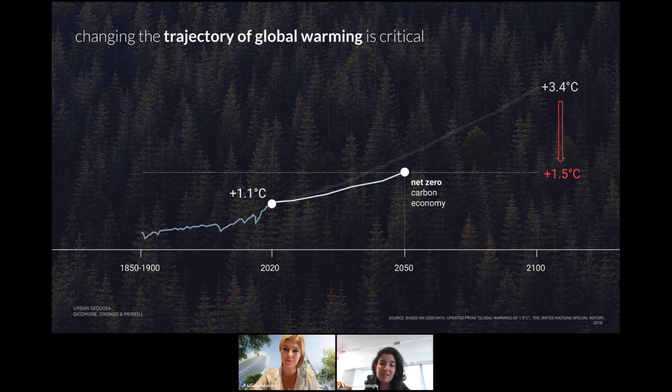I always say I was born into an amazing world, and I'm hoping to leave an amazing world for my son as well. Many of us on this call probably share similar feelings. So there's a greater incentive for all of us as designers to try to find solutions here.

So we're trying to decouple those trends, and the built environment has a big role to play here. Cities around the world are growing, and we're going to need twice as much built area as we have today by 2060. This means demand on cities will grow, demand on the planet for energy will grow, and emissions are likely to grow unless we find radical forms of reduction and absorption from the atmosphere.

In this equation, cities account for 70% of our global carbon emissions every year—that's huge. And it's not just buildings, of course, but also industry and transportation around them. But we should note that cities have the potential to be the best performers in terms of carbon emissions if we do them right.

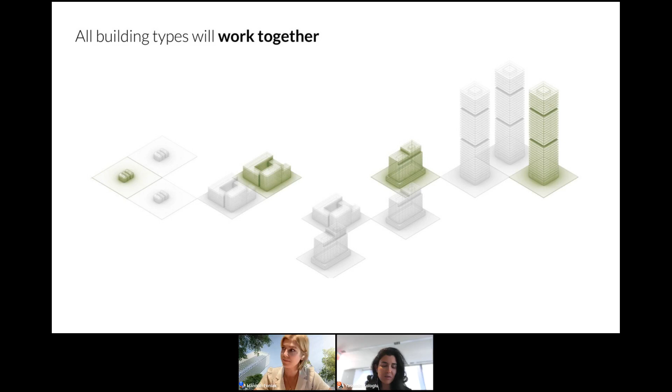So going into Urban Sequoia in more detail now, what we're proposing here is we are looking at 3 different types of innovation coming into the built environment. The first one is biomaterials.

So these are materials that are innovative in the way that they work - either they absorb carbon from the atmosphere in the way they're generated, or they might continue to absorb carbon from the atmosphere. The second one is nature-based solutions.

So these are systems that could use photosynthesis, which is a natural phenomena that our trees use. For example, systems like microalgae systems that exist in other farm format right now, not used in buildings, but they're farms that we use for microalgae production, and they're also a great source of biofuel.

And the last one is technological advancements, such as direct air capture technologies. These are machines that actually can absorb carbon from the atmosphere directly and use them elsewhere in different industries, almost as a commodity. I'm going to explain in a little bit more detail.

As part of this effort, before we even got to these innovative systems, we looked at what we can do to optimize our buildings first. Simply by using modularity of our systems and prefabricated systems, we are able to reduce the total carbon emission of a building about 30%.

This is already huge, and the point we were making is that we have to reduce as much as we can first, and then use these innovative technologies to further enhance the performance, the absorption of the building. That's the path these buildings will need to take.

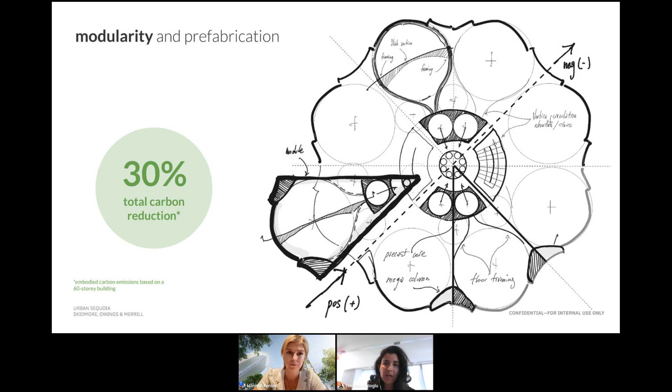And then the next step was for us to look at the holistic integration of components. Our buildings are often designed in such a way that they're additive - we'll look at the structure, then the MEP, then the floor finish, and the interior design.

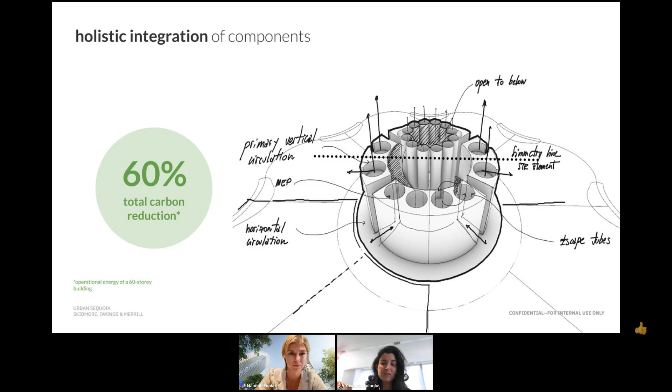We were thinking, can we approach it from a slightly different angle? Can we look at an integration of all systems? This will result in another 60% reduction in the building systems, in the energy use and carbon emissions altogether.

And what this could mean actually is that if we look at the overall picture, we are able to potentially reduce the carbon emissions of these buildings by 95% upfront. And then over 60 years of their lifespan, not only are they not emitting further carbon, but they're actually absorbing 350% more than they would have emitted as a typical building.

This is huge. Can you imagine a world where buildings act like trees? They're not part of the problem, but part of the solution to our climate, to our greenhouse gas emissions. And this was quite interesting to think about as a single building.

But we also realized that the potential of this is much greater when we think about it as a whole group of buildings, a network of structures, a city network, and maybe even a global network where buildings talk to each other. These networks work with each other and complement each other.

And by doing so, we could actually use some of the carbon saved elsewhere, the microalgae produced elsewhere, and create a synergy between buildings and the built environment to further optimize the carbon emissions, the carbon reduction and carbon absorption of the built environment.

So coming back to how do we do this, you'll see that we highlighted a couple of ideas here. The algae and biomass, the biomaterials, as well as the direct air capture, direct carbon capture basically from the atmosphere. And let's go into them a little bit more.

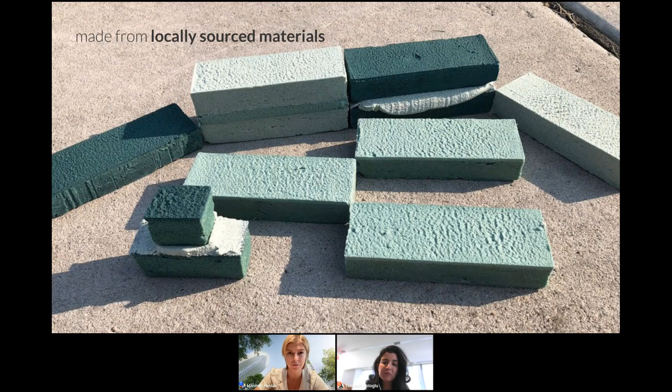And what's impressive about this is it uses, again, the simple materials we're talking about here. But all the materials, all the substances used in this, are food grade. So these are actually safe materials—in fact, it's the kids of one of the scientists we're working with at the research institute who are casting these materials to showcase it.

And the benefit of it is because it basically uses sand, a hydrogel, and algae, and you can imagine that many of these exist in many places around the world. So we're not thinking this is a solution only for the Western world or the Northern or Southern Hemisphere, but actually a solution applicable to many locations, remote or not, city or rural, across the globe at a broad scale.

This isn't the only material of its kind, but I wanted to highlight one of them today. For example, Biocrete is another one we talk about, Biobrick is the one we talked about, and bioplastic for example. All of these materials could absorb carbon from the atmosphere and become part of our solution here.

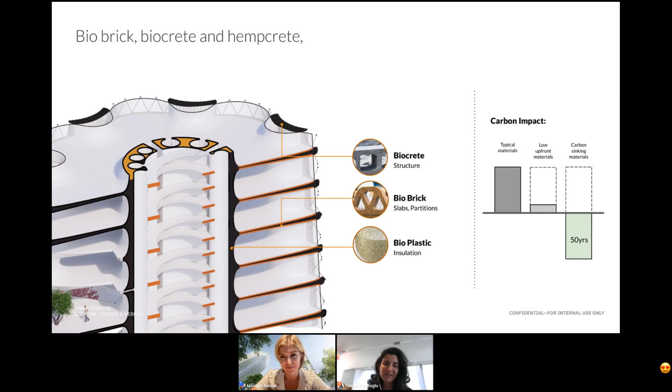Can we advocate for or explore the wider use of some of these materials to achieve that carbon sinking strategy I talked about over the lifespan of the building? Can our structures, our partitions, our walls be made of this type of material? Can you imagine, let's say my apartment was actually absorbing carbon from the atmosphere as I'm living in it? What a great story to tell, but also what a great cause for a building to serve.

And the great thing about some of these materials is also that they're often produced and cast, and they can come in different shapes. They're often coming as modular elements, which further enhances our idea of the modularity that I talked about in the beginning.

Now I'm going to pivot to a different system, to the nature-based solutions that we talked about. When coupled with technological advancement, nature-based solutions that benefit from photosynthesis, for example absorbing carbon directly from the atmosphere, represent great opportunities for us as well.

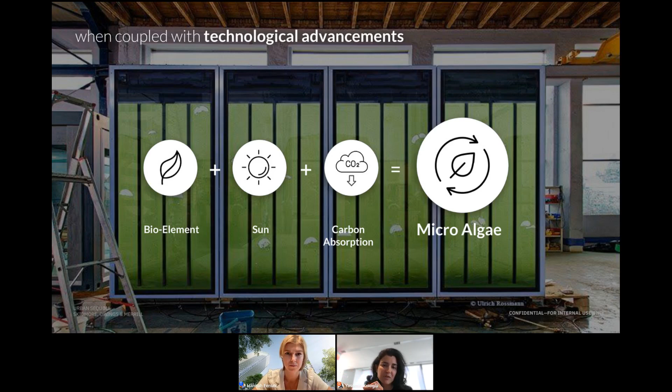In this scenario, this is actually a built facade developed in Germany that uses algae and sunlight, producing more microalgae in the system and absorbing carbon from the atmosphere. Fairly simple, actually, and you might have seen it in farm formats too. These are pictures of some of the microalgae farms that exist around the world.

It's often used as a biofuel, biomass, biomaterial to complement and replace some of the fossil fuels, for example, or reduce the demand on bioelements that we have in our agricultural fields.

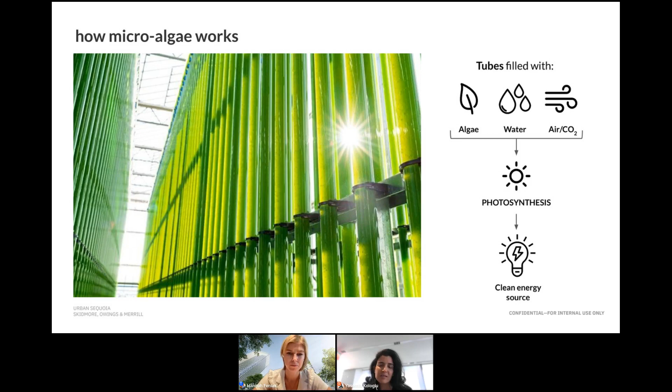And it's fairly simple again. It's a clean source of energy, relying on photosynthesis, producing algae, using water and direct sunlight to produce this. So can we think of a world where parts of our buildings could actually adopt these?

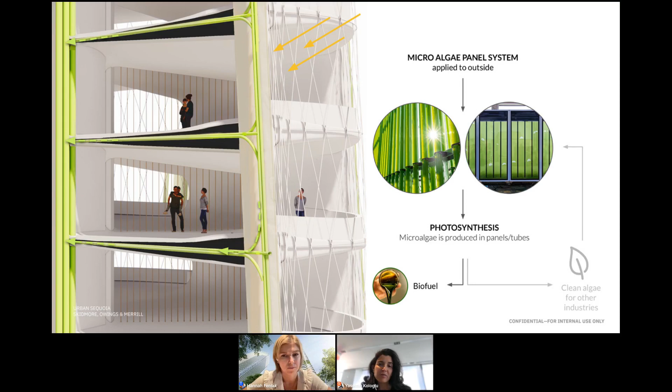Our facades in a high-rise or a low-rise get a lot of sunlight usually, and we work hard to mitigate that, to reduce it. Instead, in this scenario, can we use that to our benefit? Can we locate some of these elements there, so to allow them to produce and perform photosynthesis and produce potentially biofuel, biomass in this scenario?

We're suggesting that potentially parts of our building's facade could do so. It can be a facade-integrated system, just like the one shown in the previous images, producing biomass, biofuel that could then be used as a source of energy, for heating, electricity production, but also as a bioprotein we might use in other industries. So it has global benefits altogether.

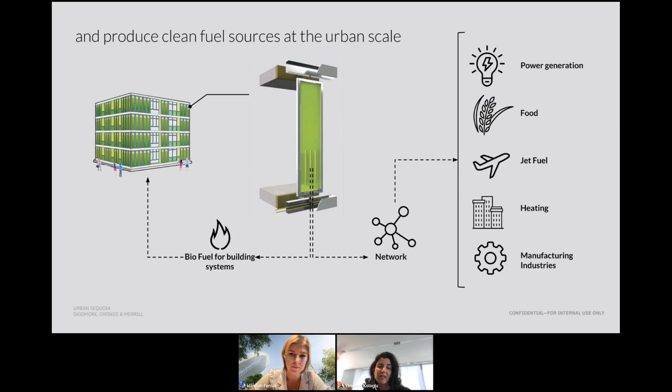This is the previous system I showed you. Could we produce biomass and biofuel on the building, and let it fuel the building systems, so we don't rely on fossil fuel or electricity? Any excess could be connected to a network of buildings in the city to use elsewhere, in power generation, food industries, jet fuels, heating and cooling, or manufacturing other materials.

This is actually a built example of this type of technology. It's a built building, and you can see the facade has microalgae in it. To give you an example of what this could be like, a SolarLeaf building in Hamburg that we were exploring and understanding more as we develop some of these strategies.

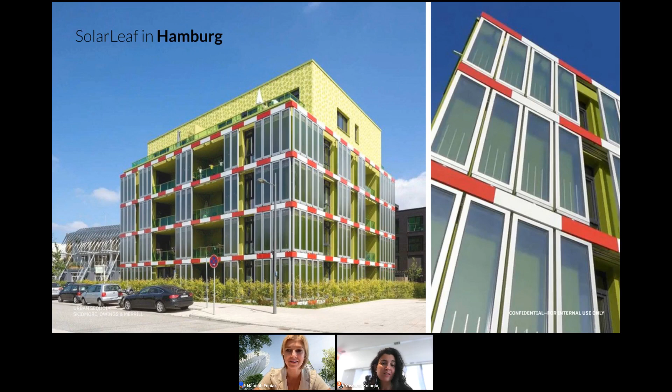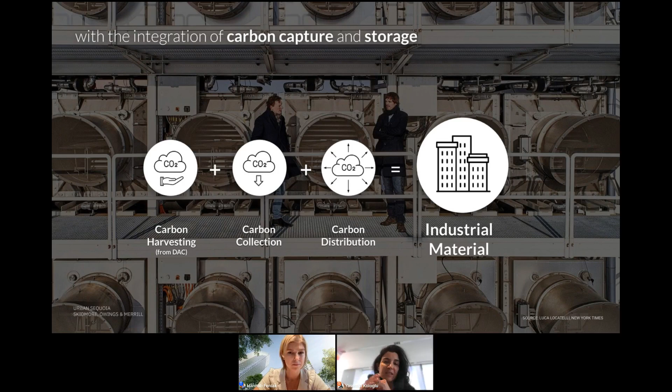What they do is the air goes directly into the machine, and it's absorbed by a filter. Then the filter is cleared to collect the carbon in various forms—sometimes it's bottled, sometimes it's in a network, sometimes it becomes a fuel source. The carbon we're absorbing from the atmosphere becomes a commodity, a collected commodity, that could then be used elsewhere.

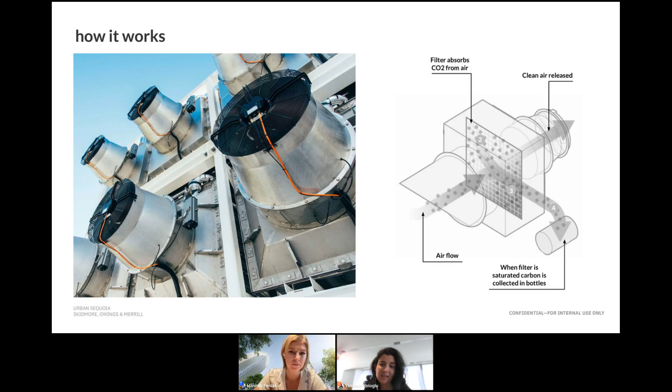So our question was, it's great to have these in farms, but can we actually develop a strategy to adopt them in buildings? Just like photovoltaics used to exist in a farm format, now they're integrated in many buildings.

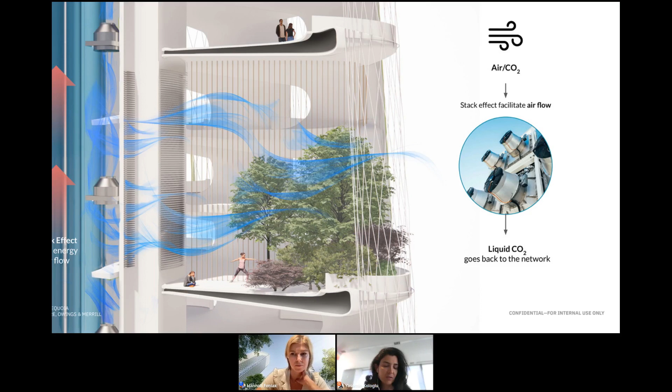So we looked at potentially using the building's natural stack effect, where the pressure difference from the bottom to the top of the building creates a natural pull of air, pulling it through these machines to absorb carbon—integrating it with the building systems to absorb carbon directly from the atmosphere. And then what could happen here?

So it could be carbon absorbed, could be used as, for example, construction material. It could be used as a part of the food and beverage industry. And it could also be used for other things that maybe aren't so intuitive, such as enhanced farming. So there's a broad use that could be adopted if we were to have a good network of carbon in our districts, in our buildings and cities together.

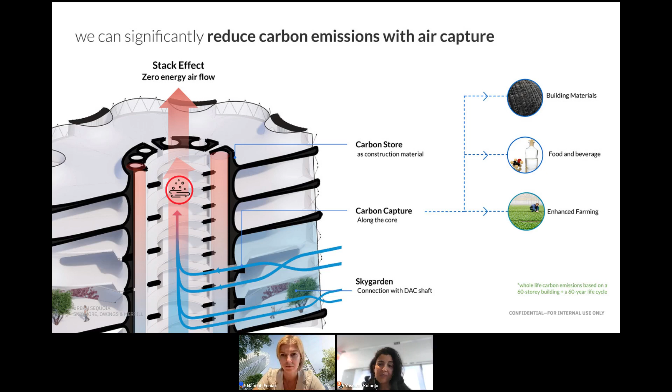And since then, we've seen several incentives from the government that's incentivized this type of technology, their development and their production, and bringing them to the market as well. She also said that her agency would invest in research in the nascent field of carbon removal, with the goal of pushing the cost under $100 per ton by 2030. So this shows a great commitment from our Secretary of Energy, hence the government.

And we are seeing some of the impacts here, that this technology is going to keep on maturing very quickly over the next years. And how is this relevant? It's relevant if we compare this to, for example, the photovoltaic industry. You might have seen farms like this on the left side, where photovoltaic fields are created in sunny areas to generate energy, or they can be adopted in buildings.

So about 15 years ago, the cost of photovoltaics were 90% more expensive. We saw a 90% cost decrease, and they became quite affordable these days, relatively more affordable. And this is part of what led to the wide use of photovoltaics, just like you see on the right side. It's one of our buildings, the first net zero energy school in New York State, PS 62.

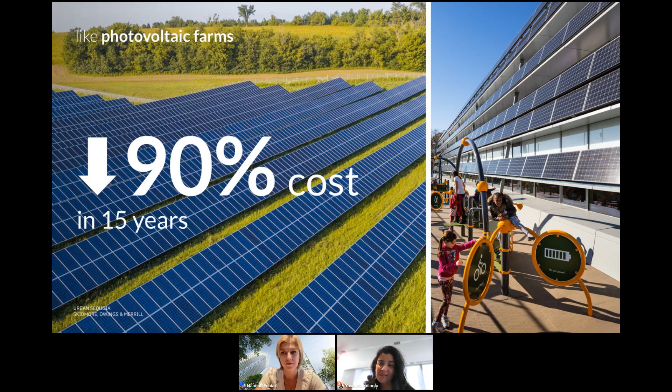As we disperse these technologies, make them available for building scale uses, you can see the cost comes down significantly, and uses and implementation also increase. So we're imagining that with everything aligning, we're going to see similar approaches. From the left side, where these technologies exist in farm format, can they go to what you see on the right, like our proposals? Can they be building integrated, just like what we see in the photovoltaic scenario?

And this really highlights how these three different types of technologies come together in our proposals: from biomaterials as part of the structure, as part of the interior walls and slabs and finishes, to how biomass can be created in the facade areas, such as microalgae, and how direct air capture technologies can support and supplement that by further actively absorbing carbon from the atmosphere.

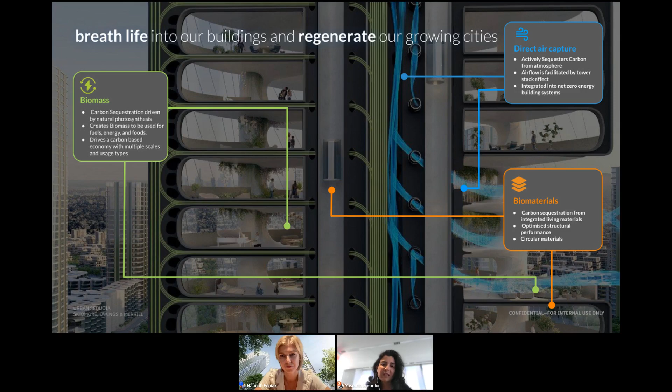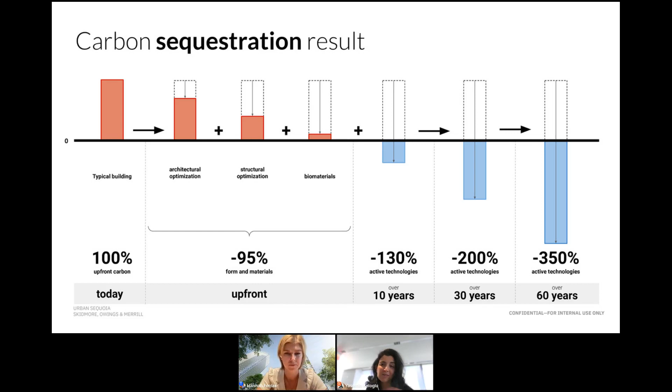And wouldn't it be amazing if we could say that every building we create from now on could achieve a 350% carbon absorption rate, rather than emission, in 60 years? Can we make every building act so? That's a great question. And again, this is just one building, but when we look at it overall, at the broad scale of cities, there is so much more potential.

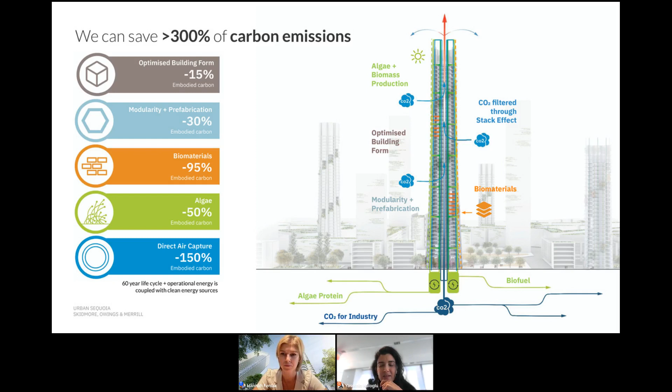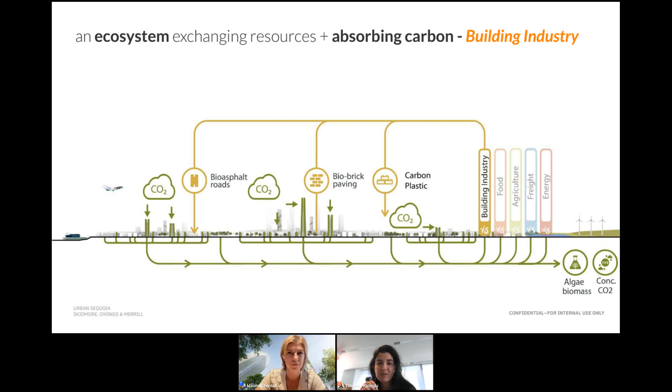The carbon that we absorb, the algae protein that we create in the building, can of course be used in the building, but also elsewhere. Can we think of a scenario where some of the carbon we absorb here and some of the algae we create here goes toward building bioasphalt, biobrick, carbon plastic? Wouldn't that be amazing?

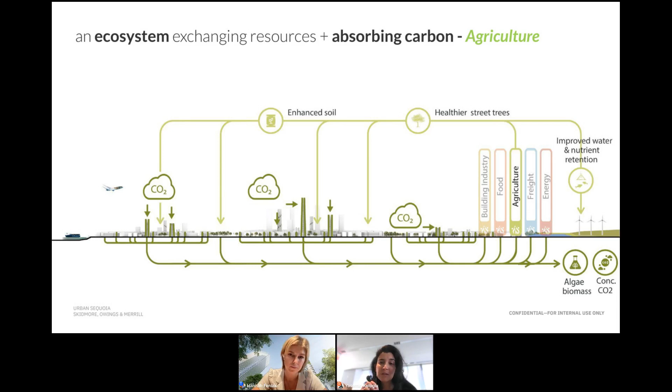Or they can also go to the food industry. Or we can extend it to agriculture. Can we enhance the soil? Can we create healthier trees? But can we also enhance agriculture too?

And also, maybe more fundamentally, they can become a fuel source. Do we need to use fossil fuels going forward? Or can some of this be used as biofuel to clean our fossil fuels, which are perhaps the primary contributor to greenhouse gas emissions globally?

And finally, we also think they can be a source of energy. Imagine if the biofuel we create here could be used to generate electricity, or could be used to heat or cool the buildings that we might occupy, and the built environment more broadly.

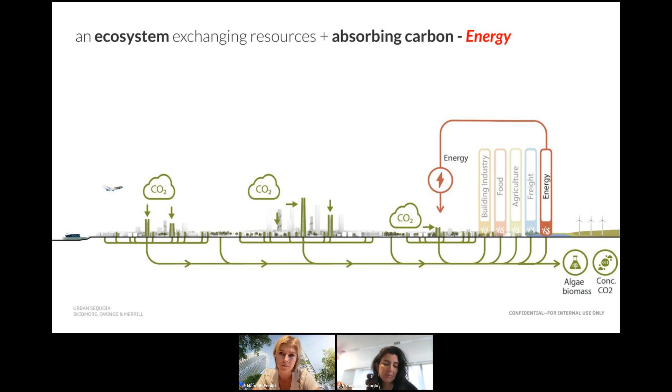And if we imagine one step further, can our cities, can our streetscapes also adjust to this new realm? Can we implement some of these strategies in our streets, in our sidewalks, in the spaces that we occupy every day as citizens? And if we do this, this will further reduce our carbon, increase our carbon absorption. So it's an area that we should not forget about when we talk about built environment holistically.

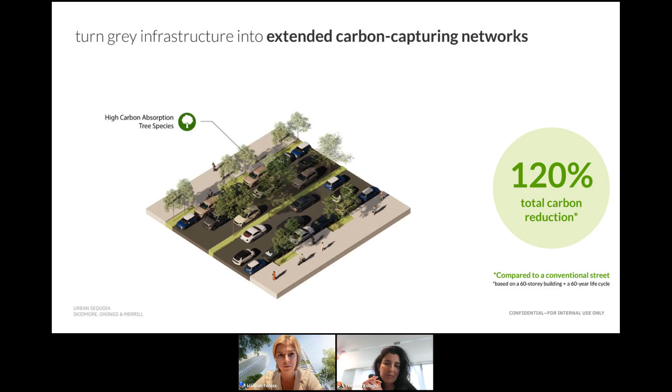Just to put things in context, in 1 square kilometer of the city, we can sequester approximately 1,500 tons of CO2 per year. And this could be huge, right?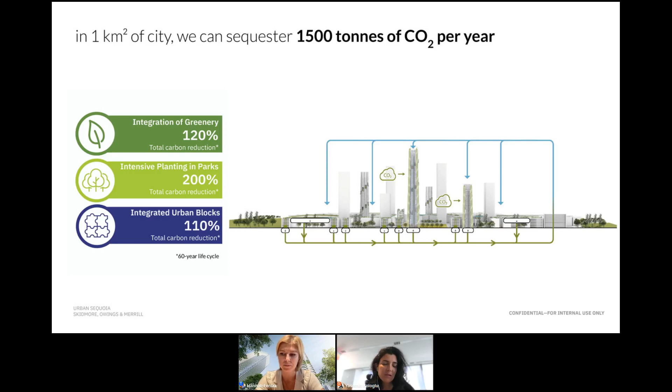With integration of greenery, intensive planting, but also use of some of these technologies together, imagine if we were to create a network in a city like New York, or if we were to actually expand this over the globe. Can we create a global network of urban sequoias around the world? This could save us 1.6 billion tons of carbon each year, and this brings us so much closer to that 1.5 degree that I talked about.

Can the built environment be part of the solution here? In a second, I'm going to ask Hannah to show the video one more time, so that now that we've maybe heard some of these ideas in more detail, we can see it one more time as a conclusion.

But I wanted to emphasize one thing here. We had a great team at SOM, an interdisciplinary team comprised of urban designers, architects, engineers, structural engineers, MEP engineers, sustainability specialists, interior designers, and researchers as well.

But also, it wasn't just our work here. We also collaborated with experts in the industry to arrive at some of these ideas and strategies. We worked with Architecture 2030, Ed Mazria, Vincent Martinez, and Erin McDade. We worked with University of Colorado, Wil Srubar particularly. We worked with Open Air Collective and Chris Neidl, their founder. And we worked with Pamela Conrad of CMG Landscape Architects as well to develop some of these ideas.